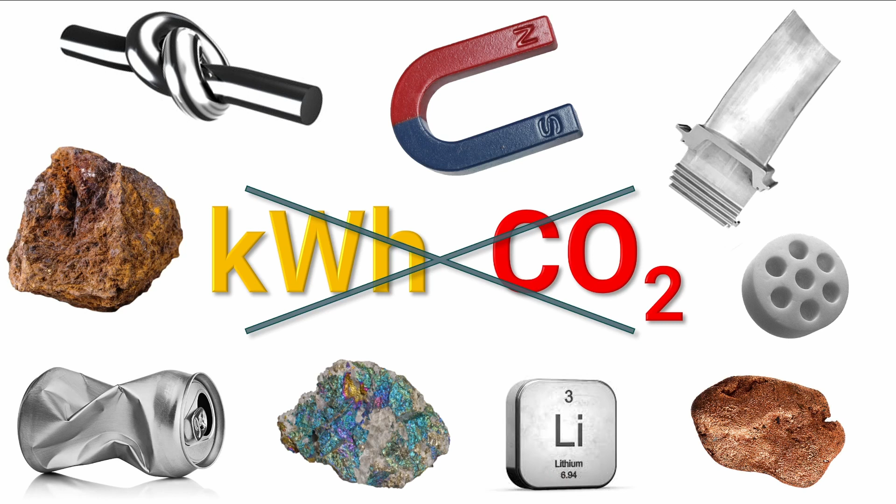But the big contributions, particularly to CO2 emissions, come from primary synthesis, characterized here by the ore or the scrap recycling. But we also have scarcity, such as rare earths, lithium, or copper—elements that are not only energy consuming to mine and produce, but also very scarce. So metals have in the past been part of the environmental problem, and in the future we hope to become part of the solution.

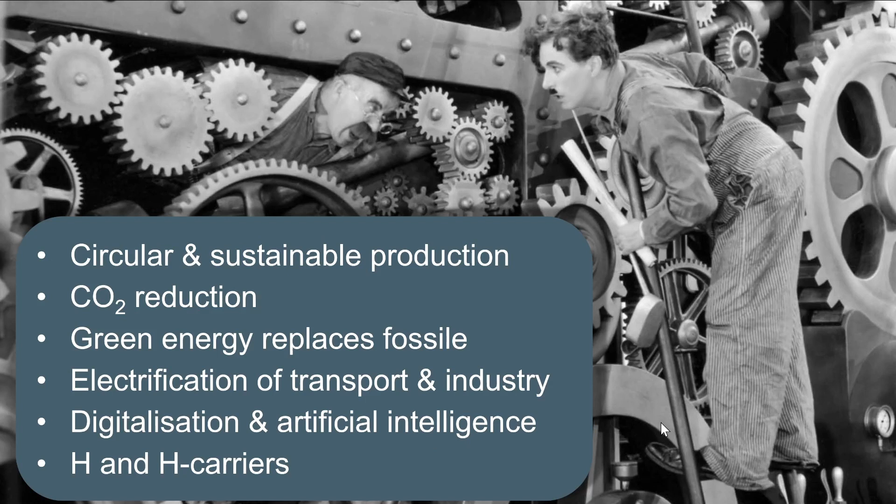Now, these problems do not stand alone, but are entangled together with a couple of related topics. The circular and sustainable production has to do with reducing CO2 emissions and replacing fossil fuel by green energy. Also, the entire transport and industry drives towards electrification, and we render processes and workflows digital to make them more efficient.

And we envision that hydrogen and hydrogen carriers will become very important ingredients of our future sustainable economy. This entanglement shows that sustainability is indeed a system science. Let me put this here on the slide a little bit more in context.

Here you see, first of all, artificial intelligence and digital material flows that enable higher efficiency of materials, processes, and workflows. Then we have materials for electrification that enable current technology trends, such as electrical vehicles. The same applies for sustainable energy sources, like windmill turbines or solar cell absorbers, or materials for electric conduction. And all these materials must be studied.

A very big fraction of sustainable material science is to make materials long-lived. That means the enhancement of corrosion resistance or resistance against hydrogen embrittlement produces materials with higher longevity, and that is one of the very important cornerstones of this field.

A somewhat new idea is maybe to design materials that carry the gene of infinite recycling already in them. That means we must design alloys that are more robust against recycling and the accumulation of tramp elements.

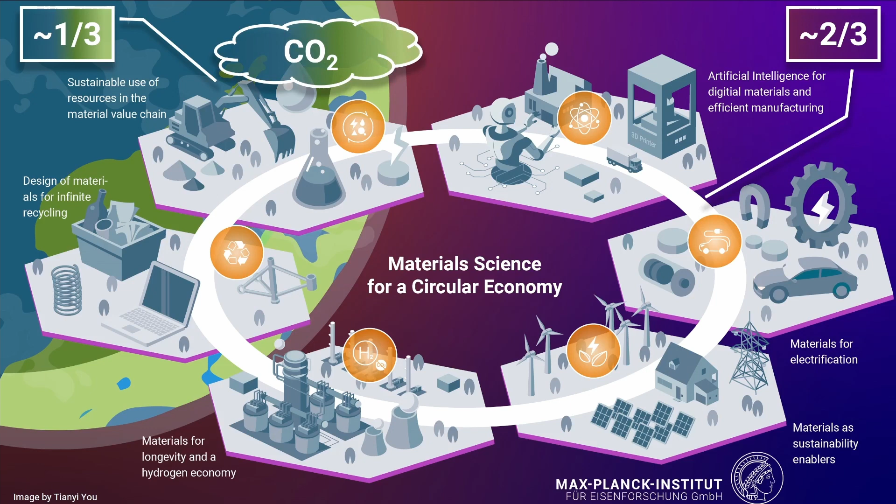And the one-third coming from primary sources, from primary synthesis, is indeed the fraction that causes the highest emissions of carbon dioxide. Now, in terms of efficiency, industry and transport cycles have already become quite good, as you can see from this diagram. So the carbon intensity and energy intensity have actually become better.

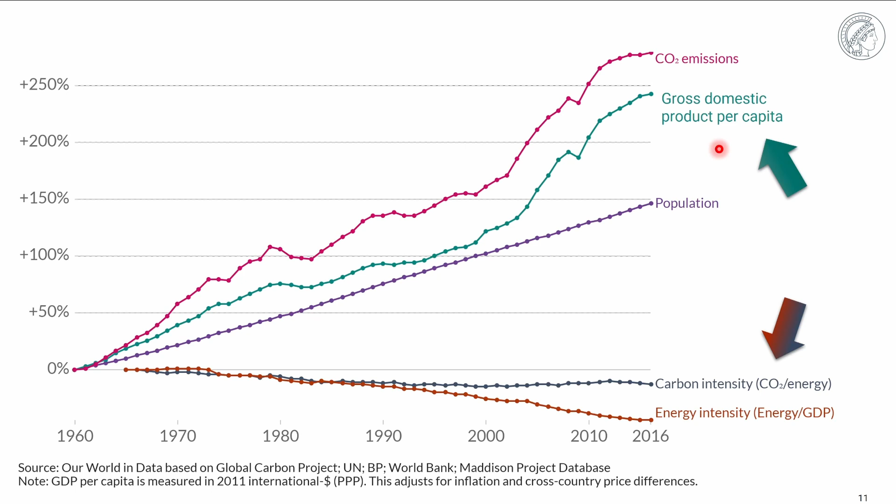But the huge growth in population, here calibrated as a linear function, plus particularly the gross domestic product increase per capita, are the real drivers behind this market growth. Another growth factor of these markets for materials are, of course, the green technologies themselves.

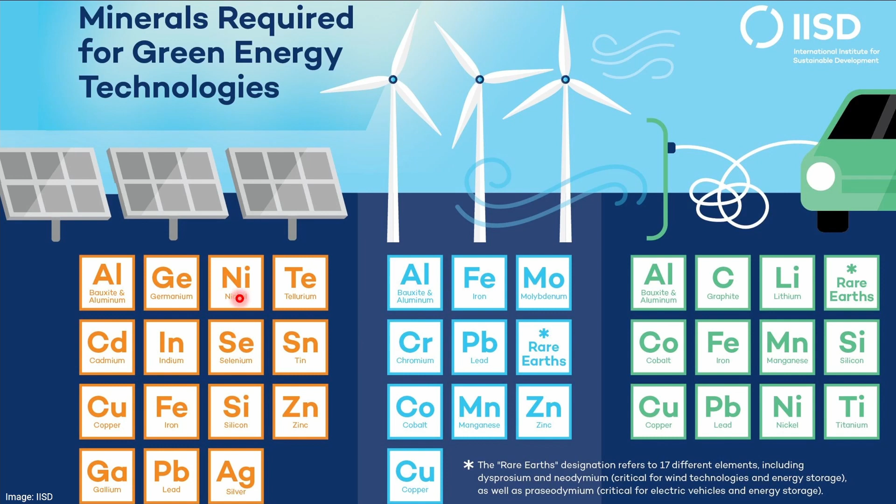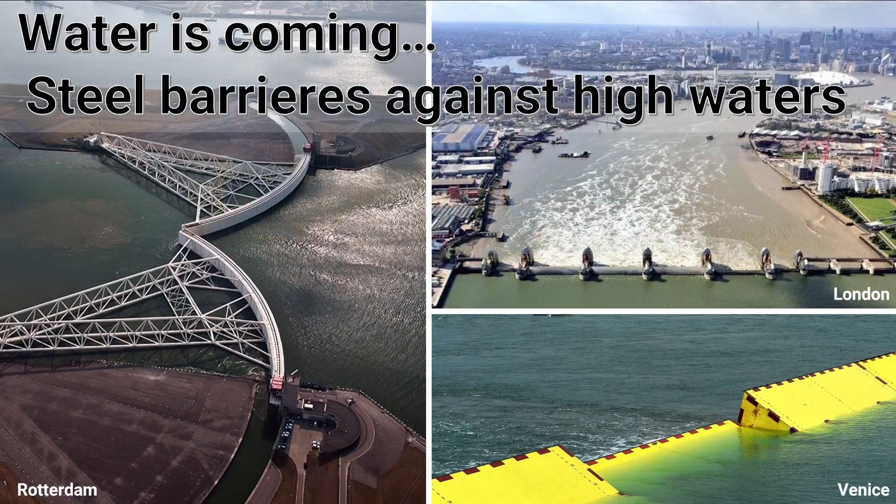Another important driving force of the international markets is that 50%, actually more, of all the world's steel production goes into construction. Due to the growth of GDP, construction goes on and will go on in the next 20 or 30 years. In a worst case scenario, when global warming goes on, we will also encounter increasing tides, and that means we will have to protect our coasts and cities against rising waters.

That means we have a 5-fold acceleration in material consumption due to population, GDP, green energy infrastructures, general infrastructures, and maybe even coastal protection. The good message, however, is that most of these factors can indeed be influenced by materials.

This projection is quite realistic, as you see here from an OECD calculation, which shows that the consumption of raw materials will actually double by the year 2060. This applies, for instance, particularly to materials like iron, copper, or other metals.

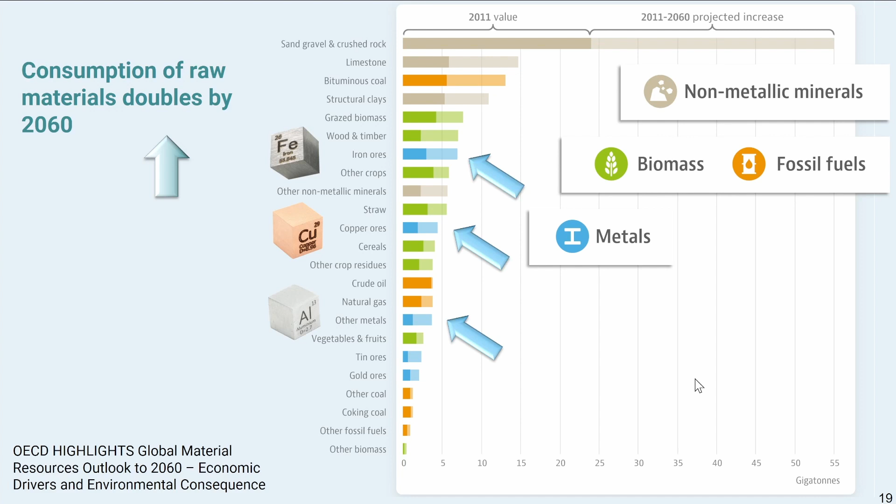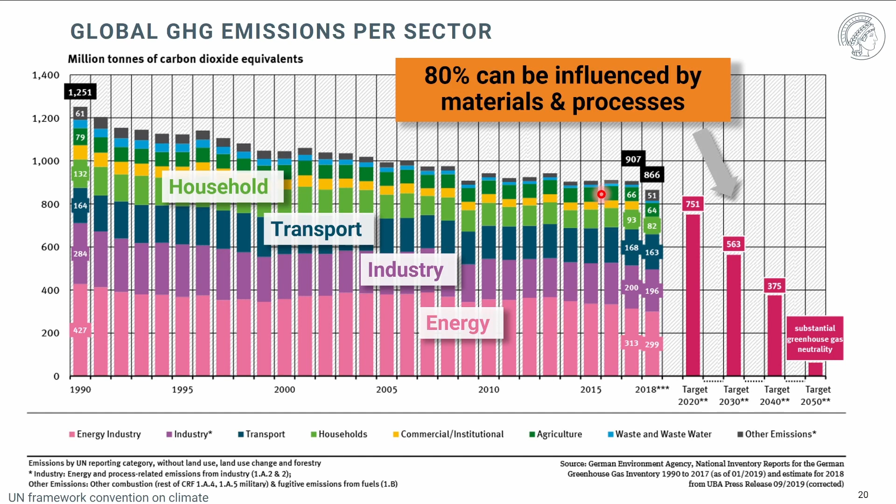Again, a good message is shown here on this diagram, where you see that across all these different sectors like energy, industry, transport, and so on, about 80% can be influenced by materials and processes. That means our field has a very high leverage on improving sustainability.

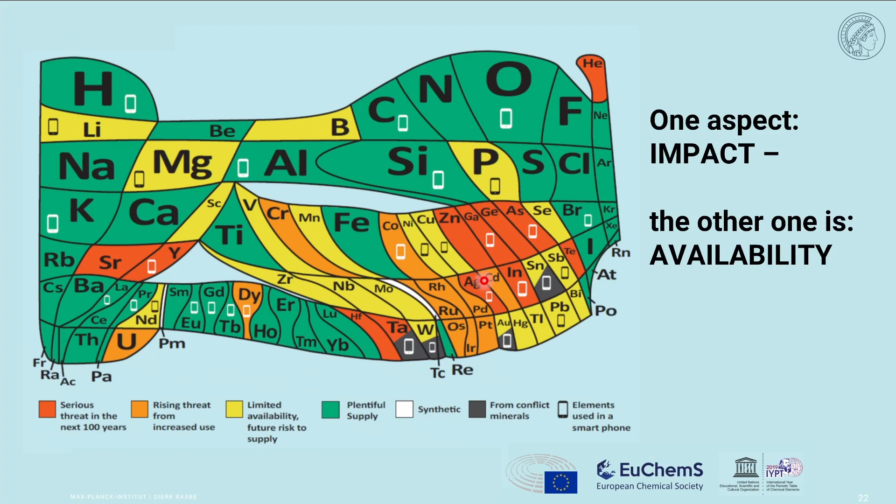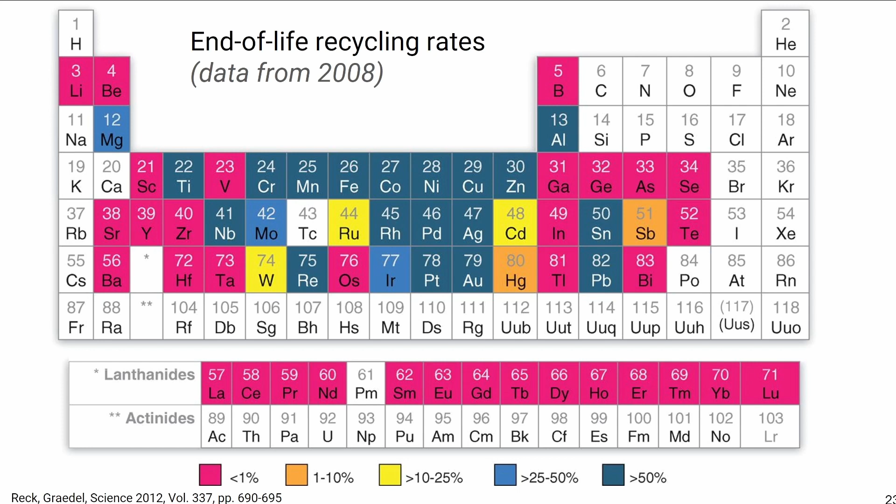What is really interesting is that some of these really important and strategic materials, shown here particularly in red color, have actually, as we can see from this paper, a very low end-of-life recycling rate. That means some of the elements that we need urgently for new technologies and sustainable technologies are practically not recycled. So again, a lot of headroom for improving.

So the punchline is, how do we tame 2 billion tons of metals per year? This number sounds gigantic, but it's actually the true number of metallic materials produced every year. And that comes with a big environmental burden. Metal production stands for about 8% of global energy consumption.

We use about 2.5 billion tons of ores every year, and these productions stand for about one third of all industrial greenhouse gas emissions. So these are really staggering numbers, but again, the good news is that even tiny scientific steps can have a huge leverage. So it's definitely worth working in these fields.

Sustainability needs quantification. What does that mean? Here's just an example of a simple life cycle assessment framework for the case of one part of iron making.

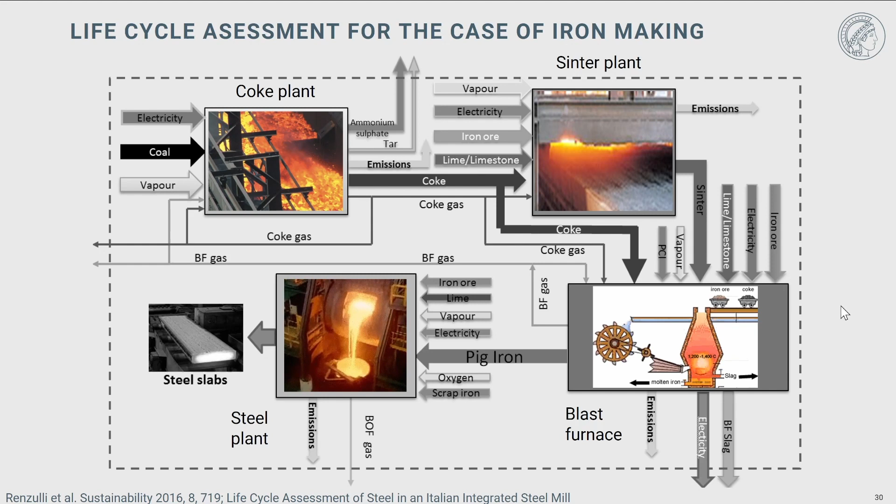This is the first part of iron making, where you see a coke plant, sinter plant, blast furnace, and the oxygen converter. Here you see, marked by these arrows, the different fluxes of feedstock, raw materials, electricity, gases, and so on. You have gates among all these parts of the plant, and you need to really calculate all the inbound and outbound fluxes with respect to quantifying what the real efficiencies and the real sustainability factors of each of these parts of the plant are.

This is very important because otherwise these argumentations and discussions turn out to be sometimes a bit hand-waving. So the quantification must go over the entire product life cycle, and that makes it also hard for industries to arrive at joint quantification measures, because some parts of a production chain have a very high carbon dioxide footprint, while others may look very good when you deliver your material to the customer.

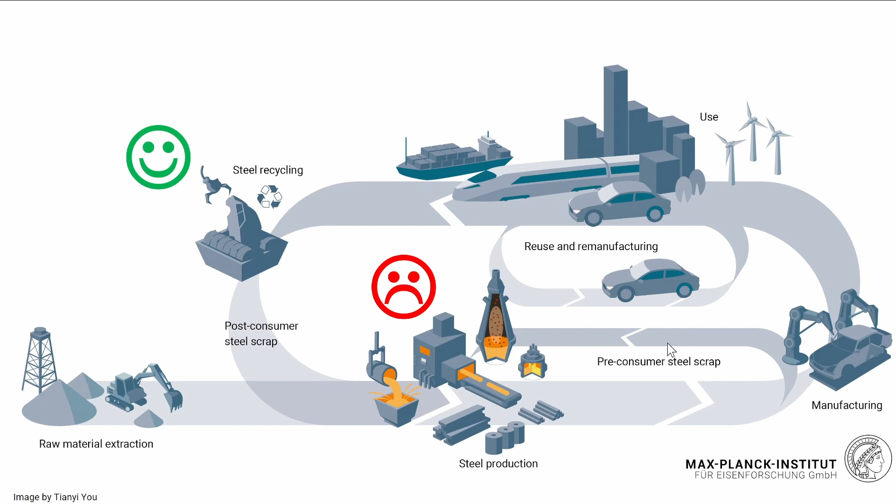And that's why it is hard for companies to agree on joint measures. On the other hand, there's already pressure from the customer industries.

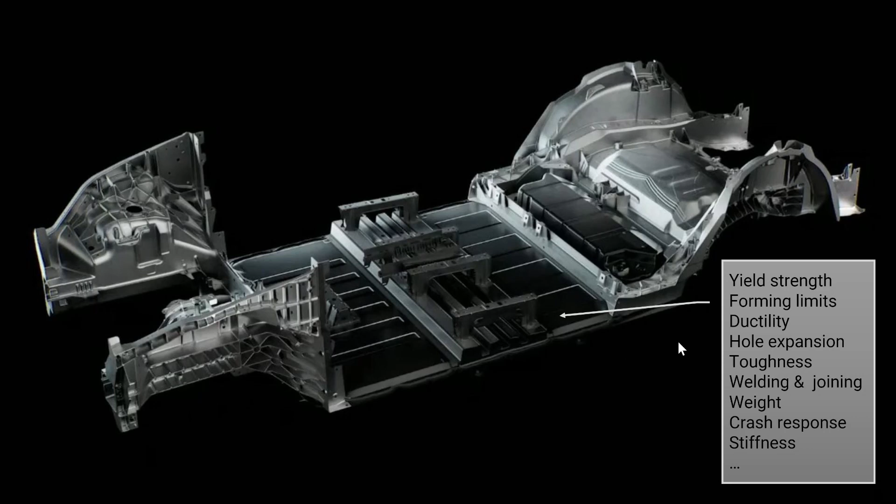Just to give an example for a typical auto part, for an electrical vehicle, we must deliver mechanical information for the manufacturing process, and tell the customer the functional properties like corrosion, longevity, acoustics, and so on. But we currently also encounter a situation where customers want all the information about sustainability: what is the recycling rate, what is the carbon dioxide footprint, and so on. These things are already in the making, and we must find measures to quantify them.

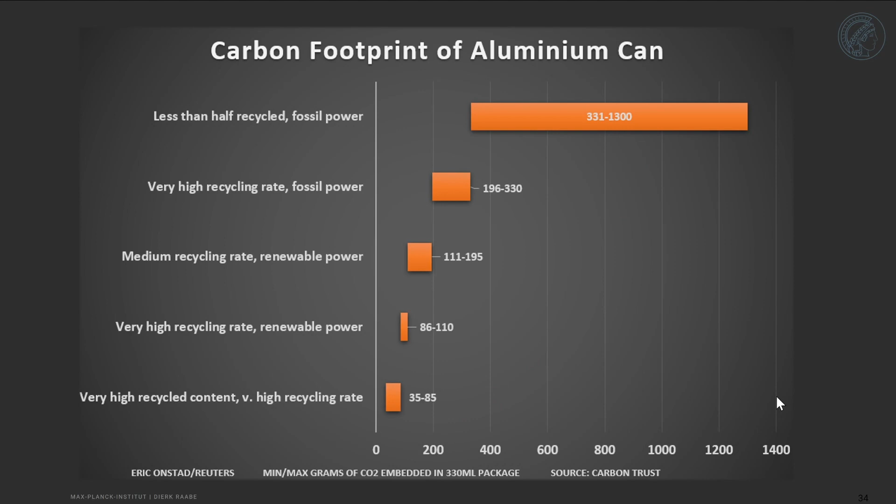This relationship goes down to only about 5% in the best of all worlds, roughly relating to the difference between the embodied energy of aluminum oxide when produced mainly from raw material, versus the relatively low electrical energy needed to remelt material from scraps, because aluminum has a relatively low melting point of only 660 degrees centigrade.

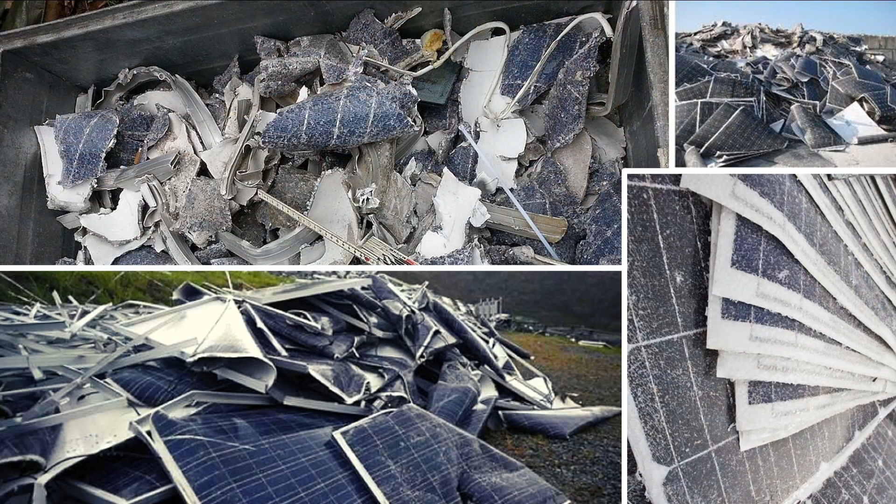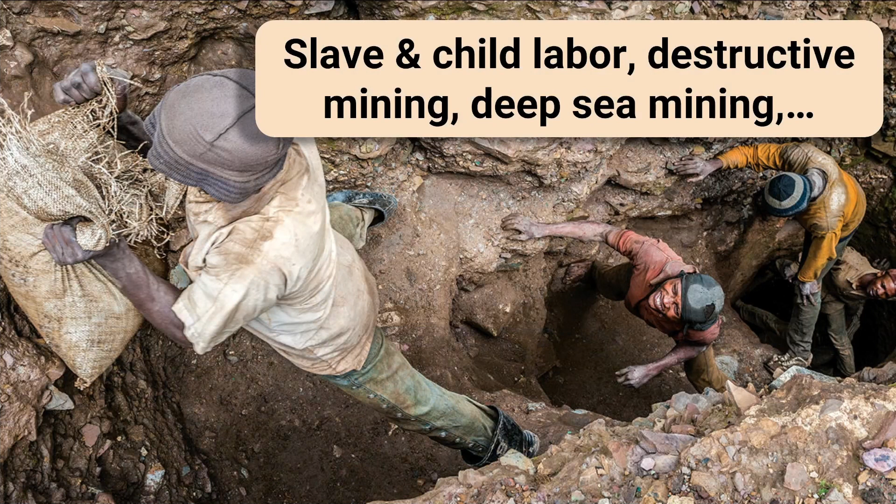Or the question still pending: what to do with scrapped solar cell panels, which contain many precious elements such as silver, copper, and silicon. That means we must in the future take more care of the sustainability and circularity of the green technologies themselves. This includes many other facets and categories, such as avoiding slave or child labor.

Another point is deep sea mining. Due to the scarcity of some elements and growing prices, for instance for copper, cobalt, or nickel, deep sea mining is becoming commercially more viable. But we start doing things at 4 or 5 kilometers depth, of which we do not exactly know the environmental consequences. So driven by the electrification trend, we start doing things that might be harmful for the next generation.

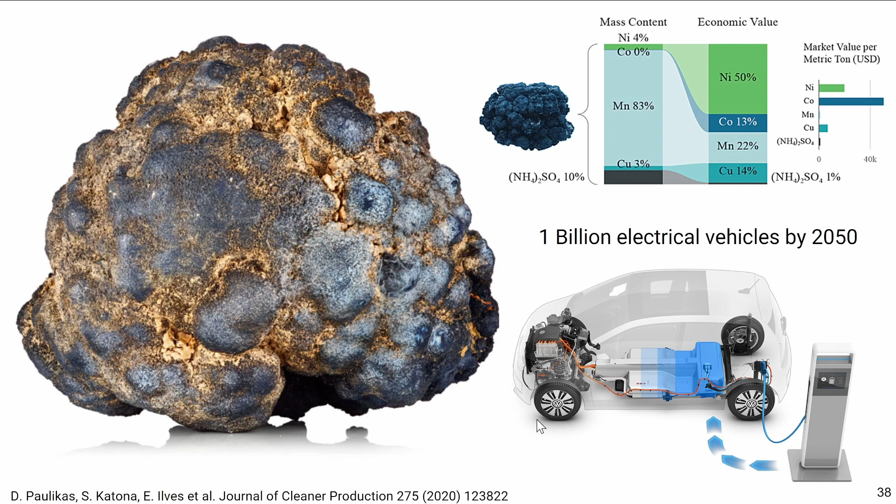Another aspect is the not sufficiently tapped urban mining. You can get 1 kilogram of gold out of about 200 tons of ore from a very good gold mine, for instance in South Africa. You can get the same amount, 1 kilogram of gold, from 3 to 4 tons of mobile phones, particularly from the integrated circuits. Similar arguments apply for platinum group metals.

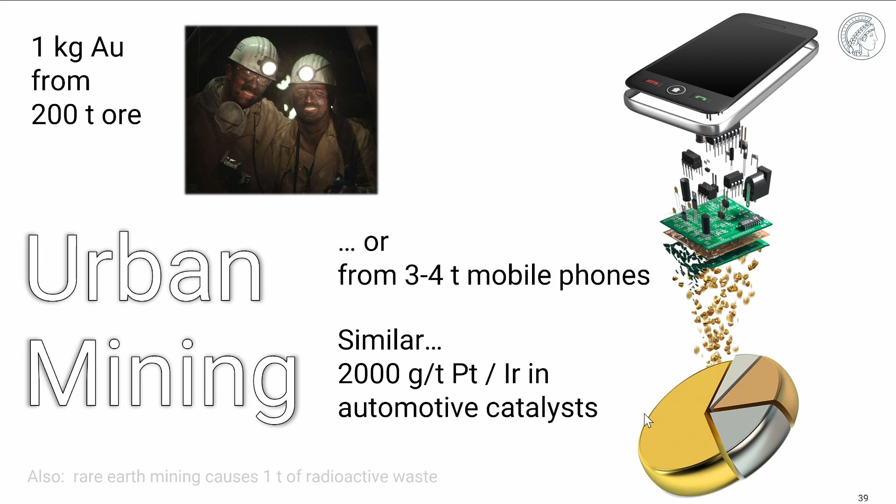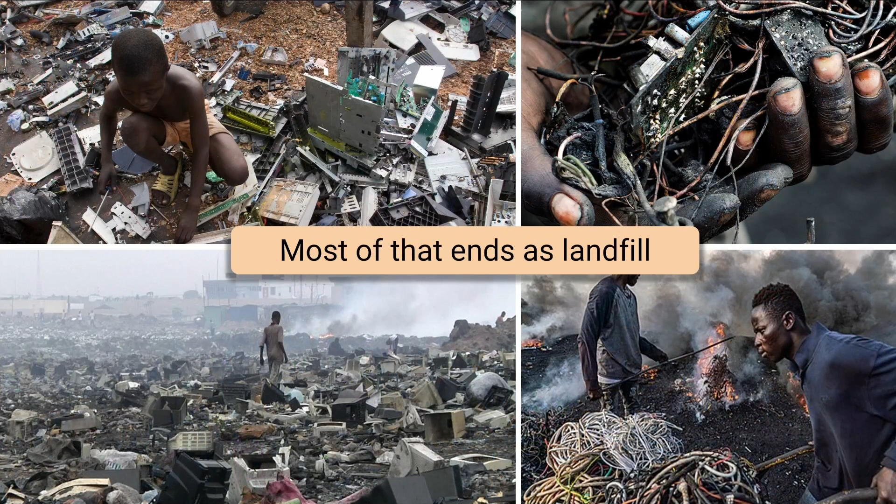That means there's a big opportunity in urban mining. Currently, however, we throw away about 50 billion euros worth of electrical waste every year without using it or recycling it. Most of these materials end up as landfill, for instance in Africa, and often children work to retrieve at least the copper back from these materials.

There will be about 18 billion mobile devices on the market by the year 2024. 75% of those are not collected, and if collected, less than 20% are recycled at all. That means there's again a lot of headroom.

When we look at the recycling of electronic and electrical waste, this is also not yet very mature. What is mainly retrieved is the copper and the gold. Typically you either just crush these scrap parts and melt them to get the copper directly out of a melt shop, or you subject them to a sulfuric acid solution via electrolysis. Then from the cathodic part you get the copper, and the anodic mud contains the gold, which you can subject to a second electrolysis.

But this is not yet all very mature and could be improved to also recycle the many other precious elements that are in these integrated circuits and mobile phones. There are also very interesting alternatives using biomining for getting these precious metals back.

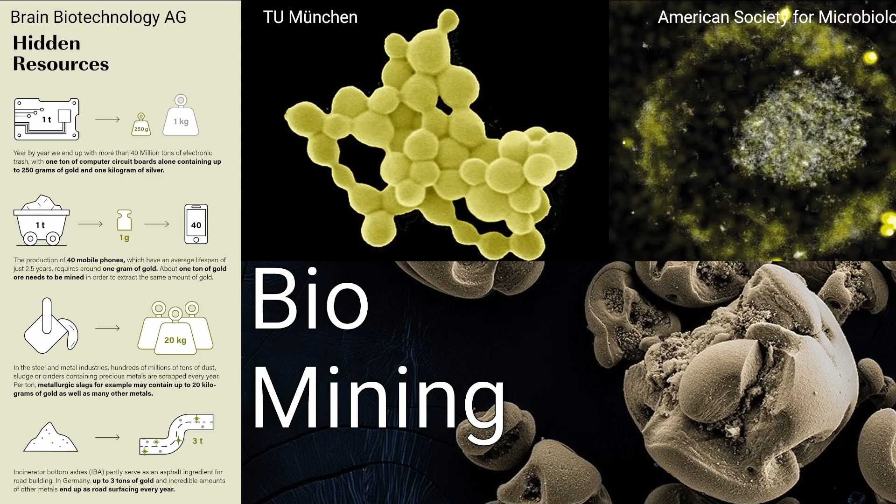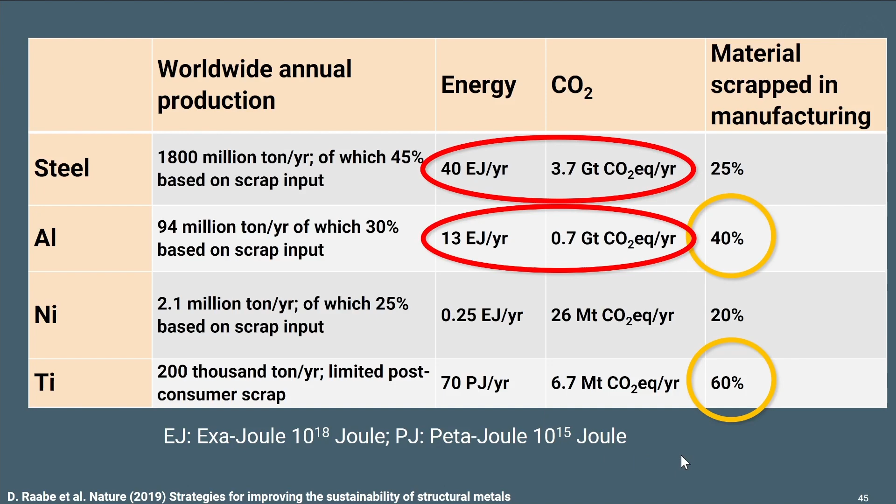Another very important point is not just the energy and CO2 footprint that we already discussed to some extent, but also the enormous quantities that are being scrapped from metal production. That has very often to do, particularly for aluminium and for titanium, with the fact that many parts are chipped out of the full block rather than being made by sheet forming.

Now one could argue from that information that it would be much more viable and sustainable to make parts by additive manufacturing, but also additive manufacturing has drawbacks, as it is a relatively expensive production method, particularly when you go for mass-produced parts. And also the powders cannot be used endlessly, but after a couple of runs you have to rejuvenate them also, and otherwise the parts might become oxidized and brittle.

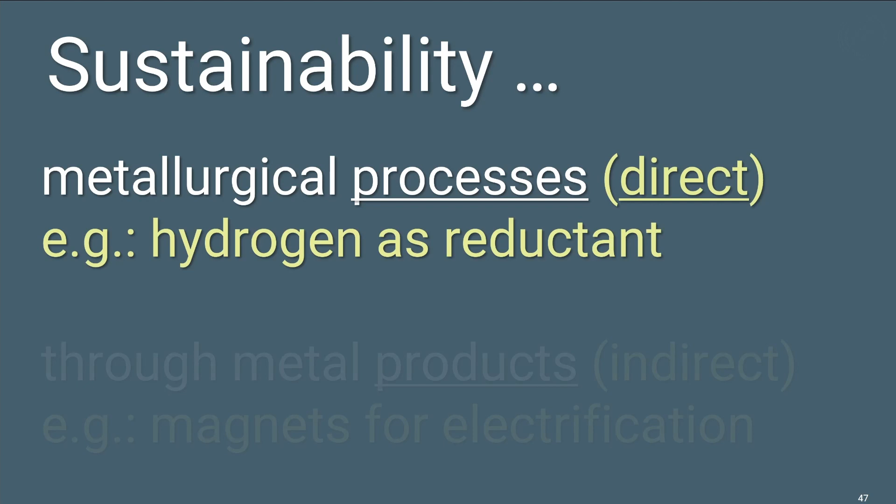As I've already said, we discuss sustainability of metals along two strands, namely metallurgical processes, which we call direct sustainability, such as the use of hydrogen as a reductant in the steel industry, or through metal products, that is indirect sustainability, such as, for instance, magnetic materials for electrification or high-strength materials for lightweight design.

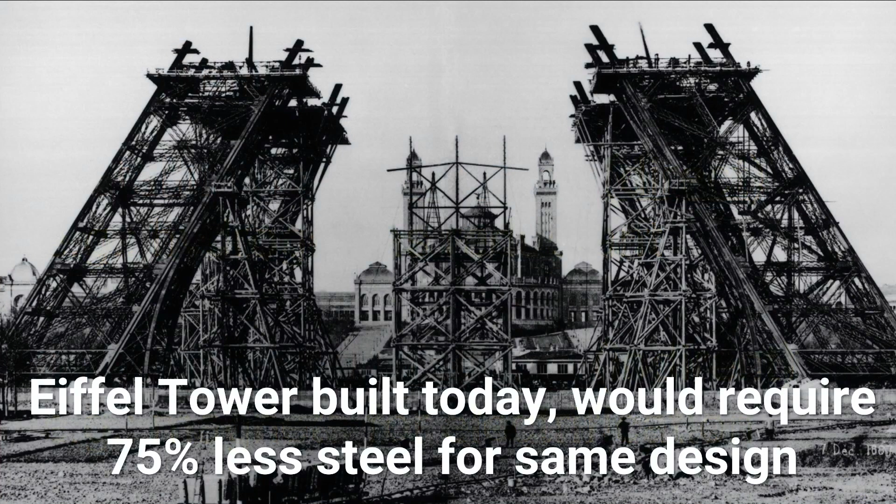Just as an example, if the Eiffel Tower was built today, it would require 75% less steel for exactly the same design. That shows you how impressive the progress in high-strength materials has been since then.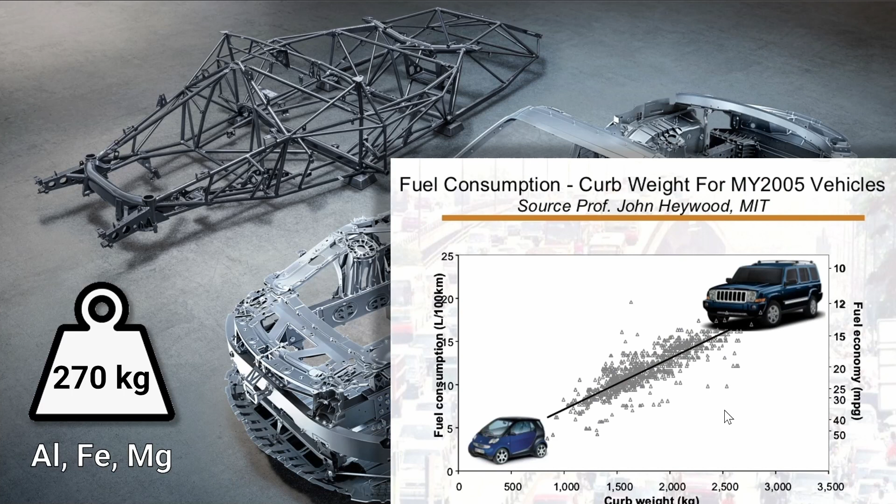This is a quite impressive example of a chassis without the hang-on parts, which consist of high-strength aluminum, iron and magnesium, and has a weight of only 270 kilograms. And that, of course, scales directly with the fuel consumption, whether it's electrical or gasoline. That means weight reduction in the transportation sector is very important.

However, we must take the next step. Look at this example. Here you have a typical mass of a mid-size SUV, 1.7 tons. And the first step, the first assignment was to massively reduce its weight, as you see here, by using higher strength materials. These can be high-strength steels or high-strength aluminum alloys.

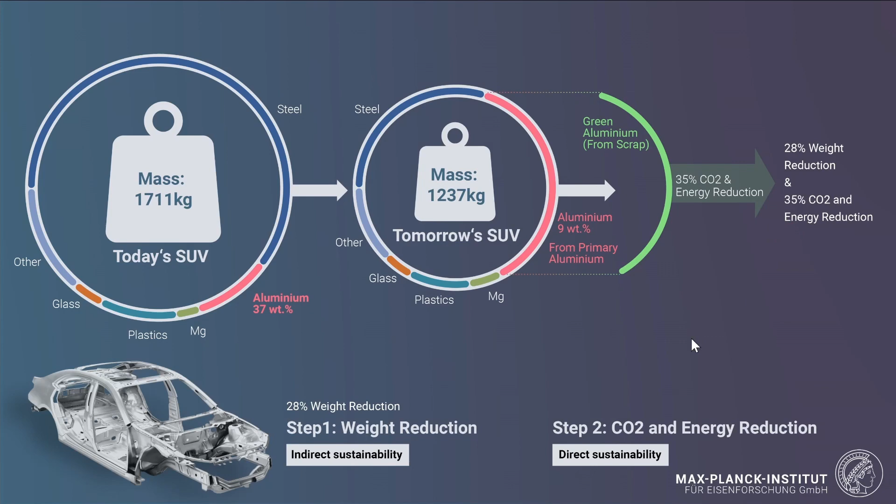But the main point of this slide is that you also now in the next step have to take care to make these high-strength materials by sustainable production methods, for instance from scraps or from hydrogen-based iron ore reduction. And then you can calculate how much reduction you have, not only in weight, but also in the CO2 and energy footprint when you make these materials. This opens up new categories for quantifying high-strength materials for the market.

One of the biggest factors is, of course, the loss of material due to corrosion. That means when you want to do something good for sustainability, you should work on corrosion or hydrogen embrittlement.

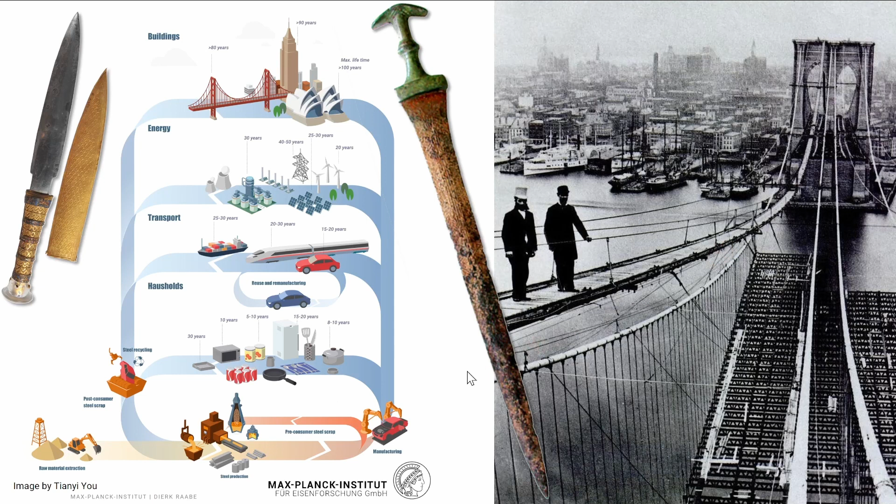This is shown nicely in this diagram, where you have the production cycle that we discussed before, here for the example of steel, but you have a wide distribution of lifetimes for the different products. When you think, for instance, of the Brooklyn Bridge, that building is 150 years old. That is very good from the longevity perspective, but before you get it back, you also have to wait 150 or more years before such materials would enter the scrap market again. So this must be built into consideration regarding scrap markets.

Here are some other nice examples like the dagger of Tutankhamun from meteoritic iron, or a Hittite sword which is 3000 years old from the beginning of the Iron Age.

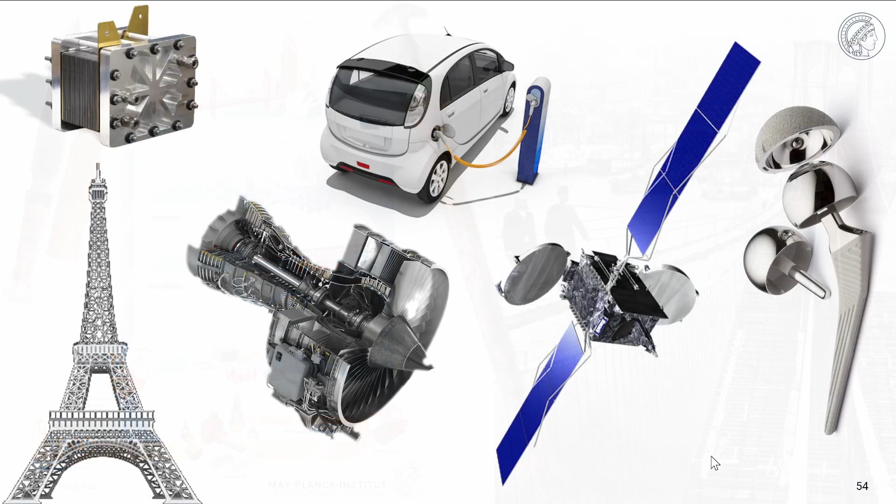So the good thing is, of course, that in our field we have a gigantic global market for materials, namely more than 3,000 billion euros per year. That is very good, but our assignment is the question of how these markets can be turned into circular ones and how they can be rendered more sustainable.

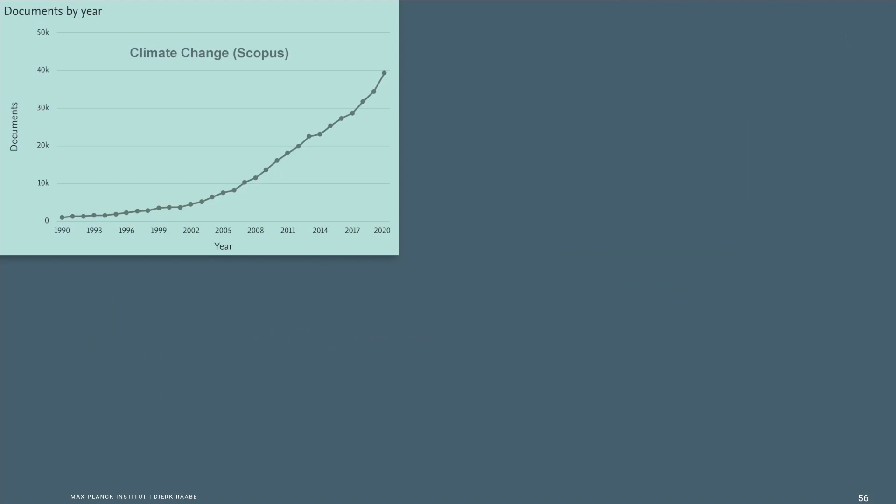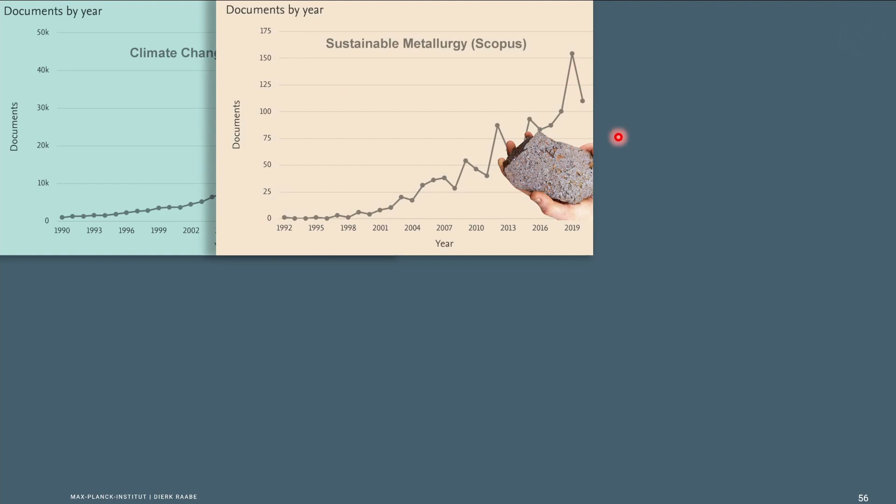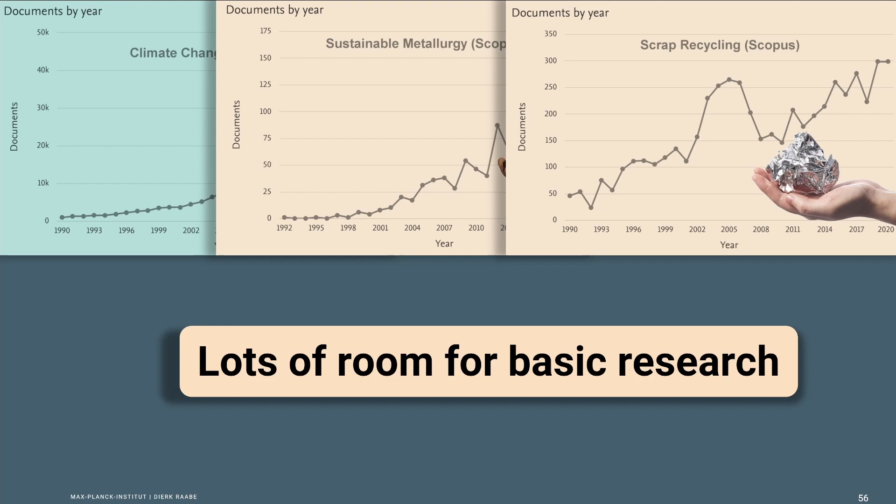And we, of course, as researchers want to know what are the basic research questions. When we look into Scopus, we see that there are more than 40,000 papers every year on climate change, on the science of climate change. But when you look at how many papers are written on sustainable metallurgy, you have maybe between 100 and 150. And similar numbers apply for scrap recycling. When you look for papers that deal with the science of scrap recycling, you maybe find about 300 papers. So that means there's lots of headroom for basic research, not only to study the effects of CO2 emissions and energy consumption on climate change, but also to find solutions for solving these problems.

In the Gates Notes blog of Bill Gates, you find the comment: whenever I hear an idea for what we can do to keep global warming in check, I always ask, what's your plan for steel? So let's go a little deeper here and give the man an answer.

We already saw that the market for steel is growing enormously. Towards 2050, we envisage consumption of about 2.8 billion tons of steel per year.

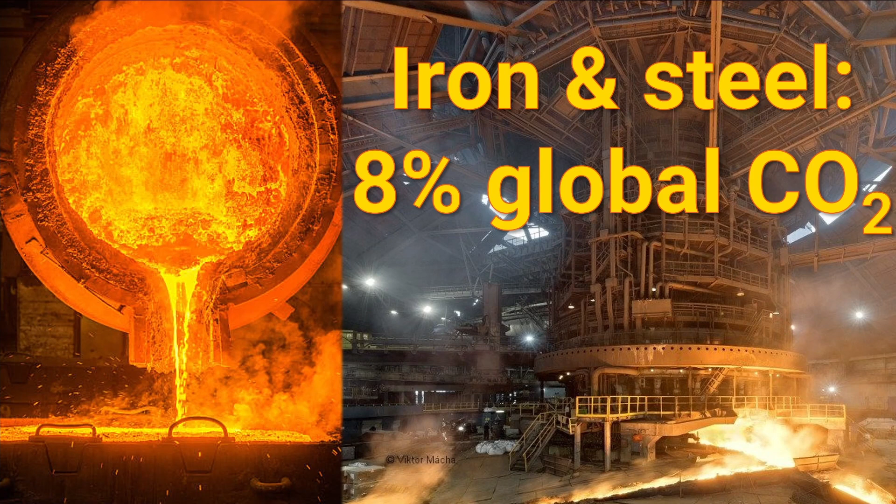This incredibly large amount of material is a big environmental burden because the primary synthesis of iron from its ores, like hematite, is made using carbon carriers as reductants to produce iron, and that gives in the mass balance very high CO2 emissions. That is the reason why iron and steel making stand for about 8% of global CO2 emissions.

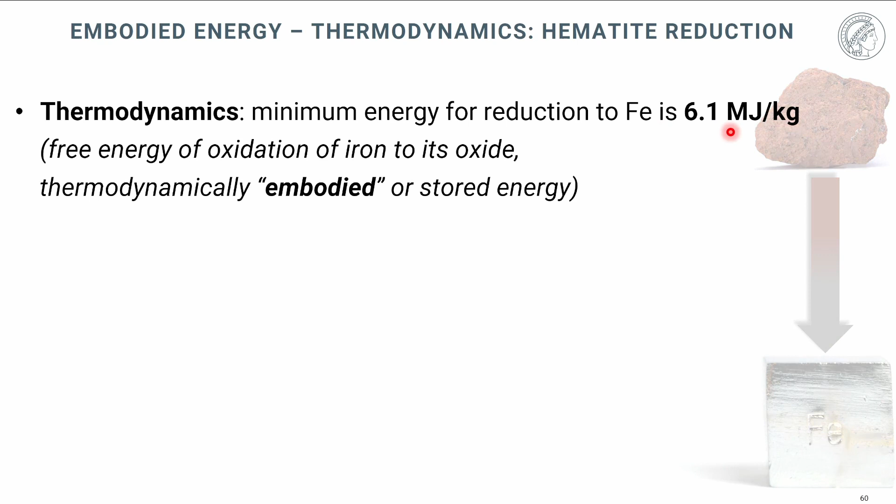When we look just at the thermodynamic limits, we see that we have about 6 megajoules per kilogram embodied in the iron oxide—that is the thermodynamically stored energy of the iron oxide. When we measure from cradle to grave the total energy required to make iron, we talk about 20 to 35 megajoules per kilogram, which is actually quite good compared to most other metals, but much more compared to the embodied energy. That means most of the energy is lost as waste heat, and that applies to many metals.

So one solution is reducing the iron ores with hydrogen instead of carbon carriers. This overview compiles a couple of options that we have.

In the center you find the raw materials—scraps, fines, and lump ores—and you can subject them to reduction cycles with a couple of reduction means, like different types of molecules, such as hydrogen or ammonia. You can use electrons directly, you can even use protons or ions, and they can have different aggregate states like gas, solid, liquid, or plasma.

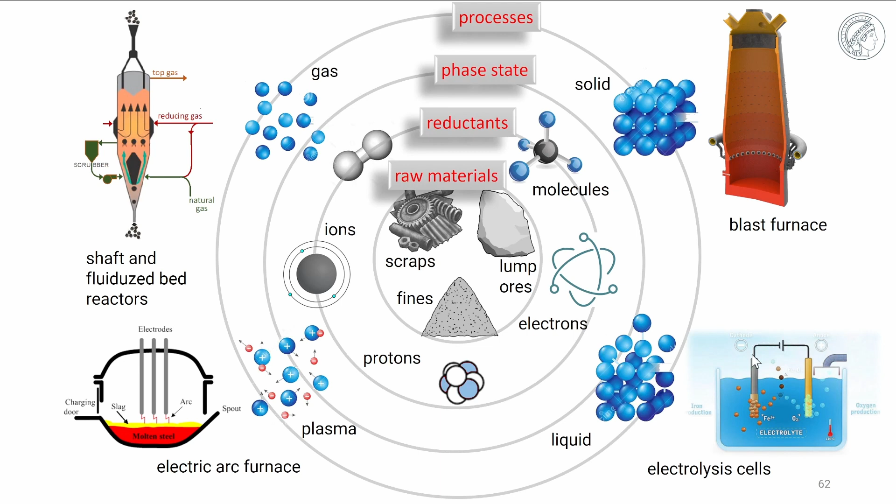From these considerations you arrive at a number of different possible processing pathways for how you can reduce iron. Each of these pathways has an individual energy, CO2, and hydrogen footprint that must be considered. Let me show you a few examples about hydrogen-based direct reduction of solid oxides that are exposed directly to hydrogen.

Here we have the kinetics at 700 degrees centigrade under hydrogen atmosphere. First you see the very fast reaction rate from hematite to magnetite and from magnetite further to wüstite. But as soon as you get into the wüstite reduction state, which is further reduced towards iron, the reaction becomes very sluggish and slower and slower as you go along.

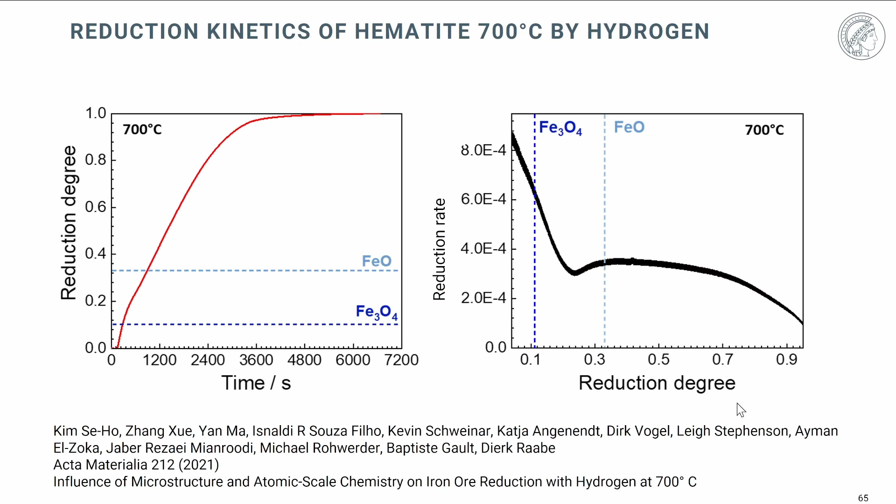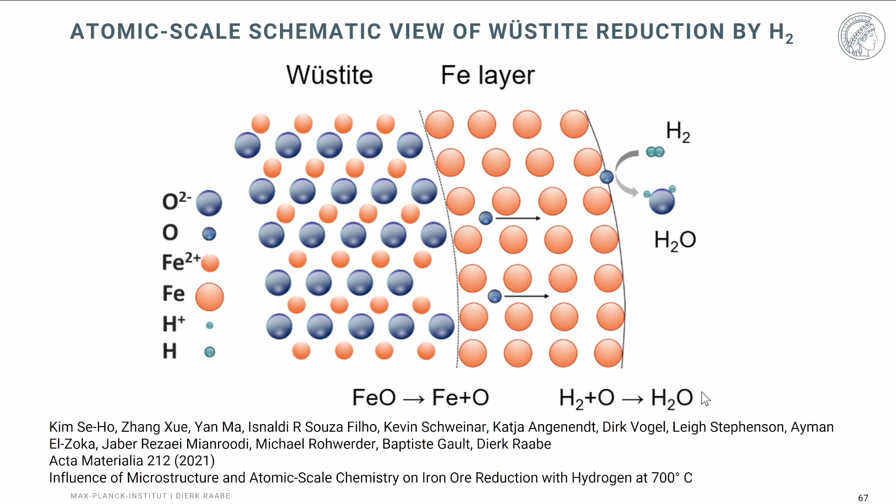This is shown schematically here. That means the oxygen from the wüstite must escape through that iron layer towards the surface, where it can recombine with hydrogen to form water. This is the current picture that we have about this process.

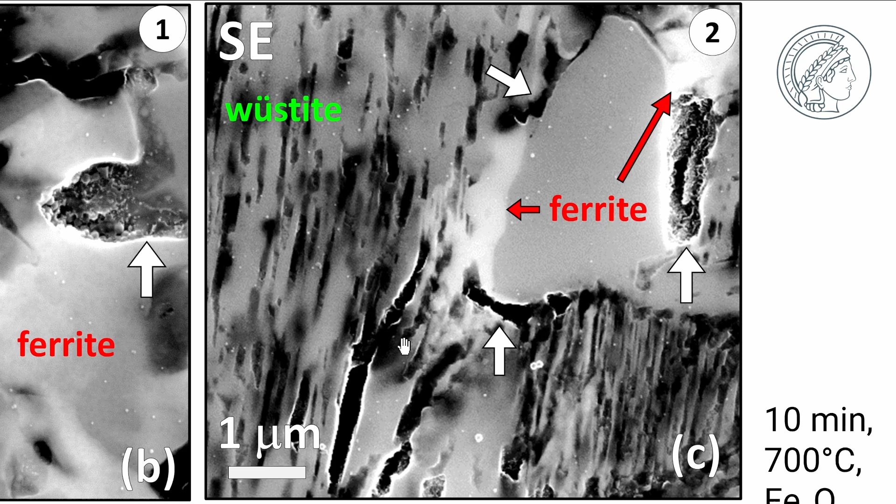However, when we really look into the microstructure, you see that things are much more complicated. There are very different microstructure features that form—for instance, the ferrite with delamination that you see here, formed on the core region of wüstite. You also see cracks, delamination, and very complicated substructure features. These microstructures were taken after 10 minutes at 700 degrees centigrade under hydrogen atmosphere.

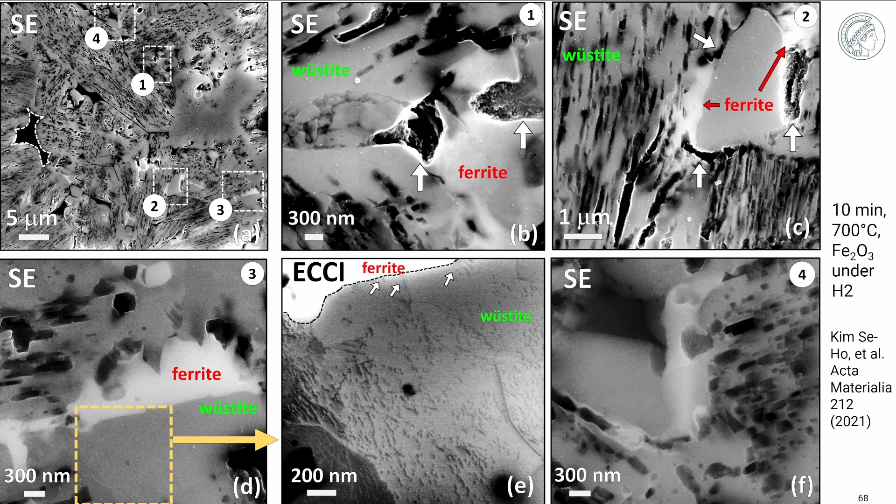Here you see, in the electron channeling contrast imaging, very complex dislocation substructures form. This has to do with the fact that the different oxide states and metal states occupy very different volumes, which means you not only form massive pore structures during reduction, but also build up very high stresses.

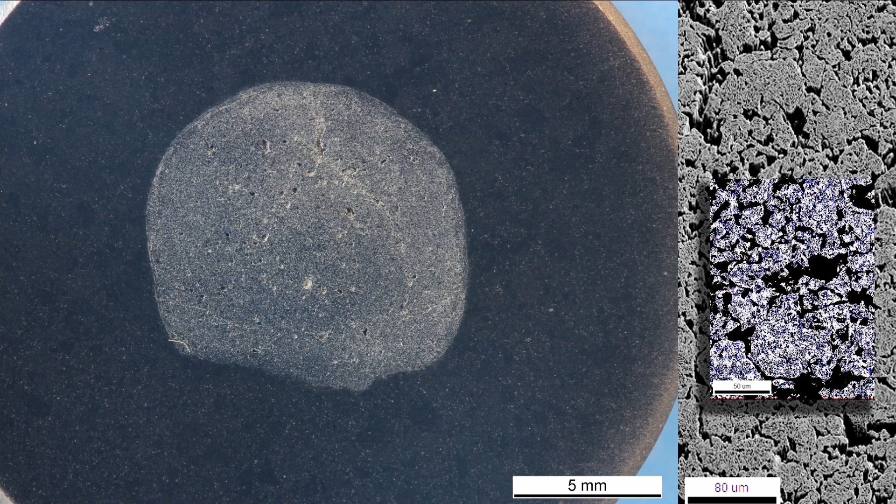Now, if we walk through such a commercial pellet, this little oxide piece that is an agglomerate of fine ores is called a pellet, typically used in direct reduction. When you cut it open, you can subject it to all kinds of microscopy mapping techniques, chemical or structural. You can look at the phase, the distribution of grain boundaries, and so on - the same things you would do in ordinary materials - and you get these very complex microstructures revealed.

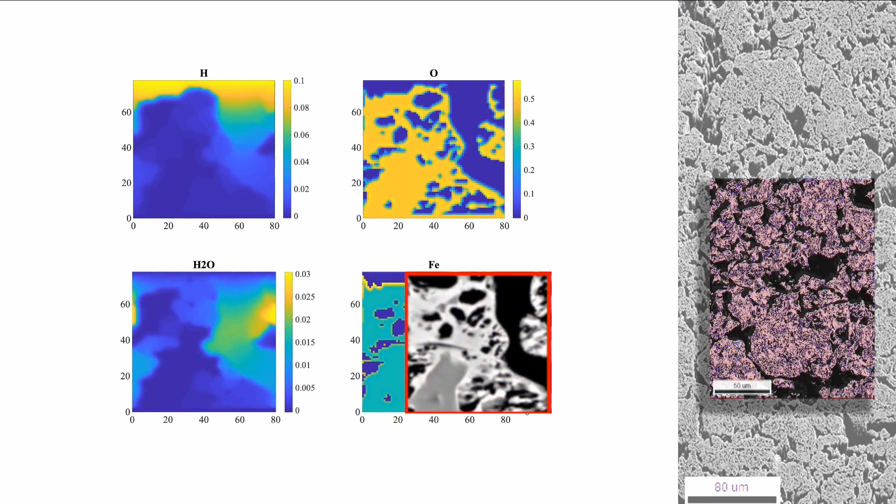Now we are interested in subjecting them to a boundary condition treatment through a corresponding phase field calculation. In this phase field calculation you can see the diffusion of the hydrogen and the oxygen, and the formation of water as a reaction product. In this diagram you see how the iron is starting to penetrate the former oxide.

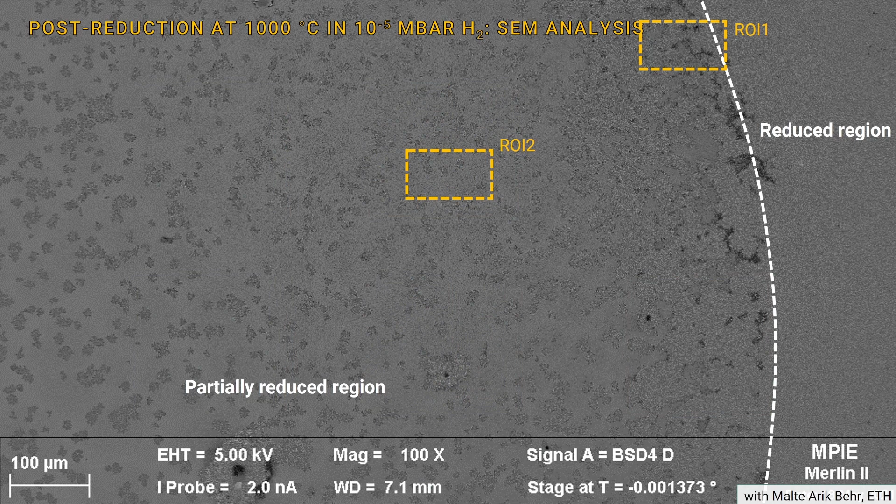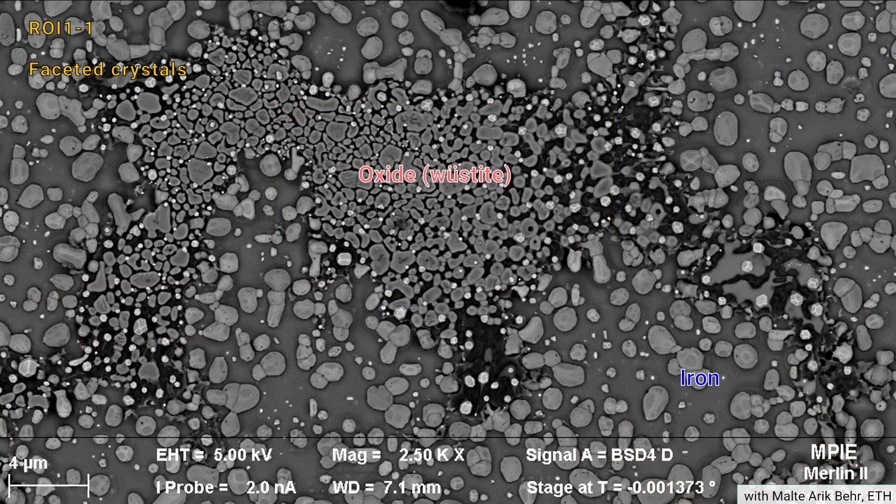Now the next step - this is again a collaboration with colleagues at ETH Zurich, here with Malte Arik Behr - we try to study these things also in quasi two-dimensional wüstite films, which we subject in situ to a hydrogen atmosphere, and then study how the iron is really forming between the different wüstite layers, under reduced dimensions in quasi 2 dimensions. Here you see how these very beautiful shapes of the iron nuclei are forming.

We also look at the characteristics of these pores that form at very high resolution. This is high angle annular dark field imaging. Through electron tomography, we aim to study not just the dispersion and distribution of the pores, but also how they are connected - that means how they percolate. This is very important information we need to better understand how gas transport in the material takes place.

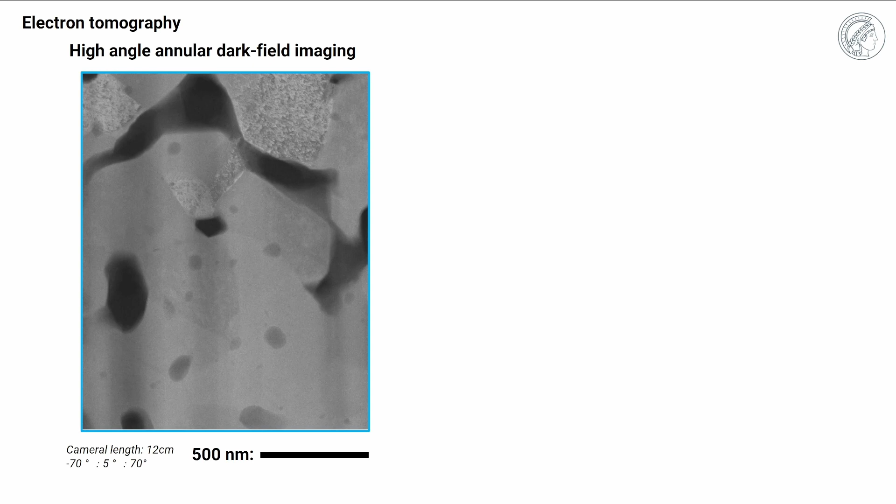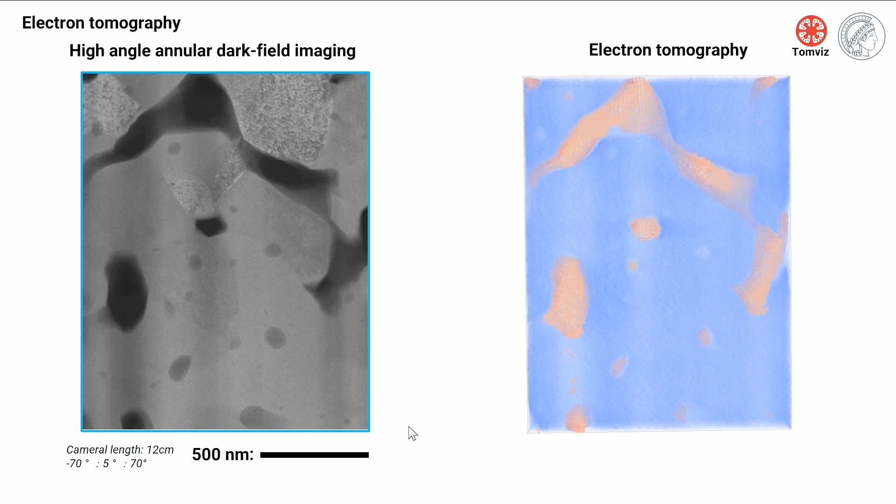Here you see a complex polycrystalline structure around such pores that form, and you can see that many of these pores are actually highly isolated - not connected, so that the water forming inside these pores cannot leave the material but stays inside. And that is quite interesting.

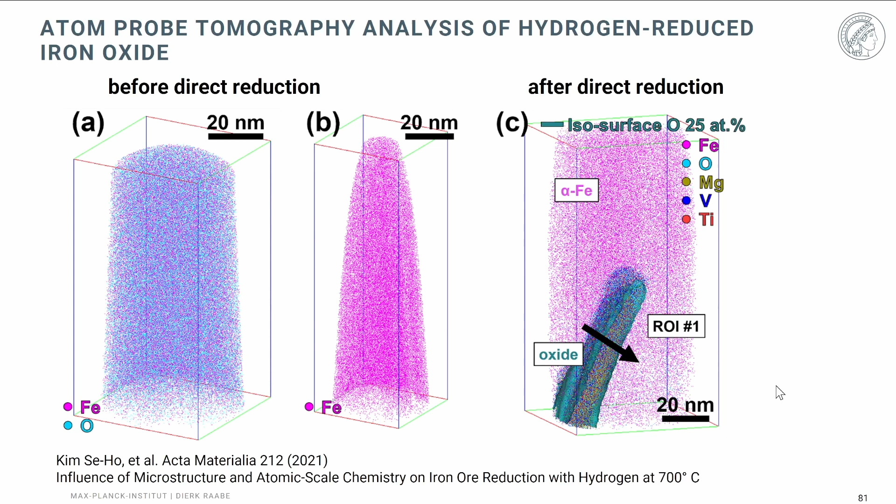We also go to the near atomic scale by using atom probe tomography for these materials. Here you see that before reduction you see just the wüstite material, a wüstite single crystal, and after partial reduction you see the BCC iron that has formed, but also, due to the gangue, the chemical tramp material that was in these ores. You see that some of these oxides have prevailed and remain in the material, and we study their role in the formation of water, for catalysis, but also for delays in the reduction kinetics.

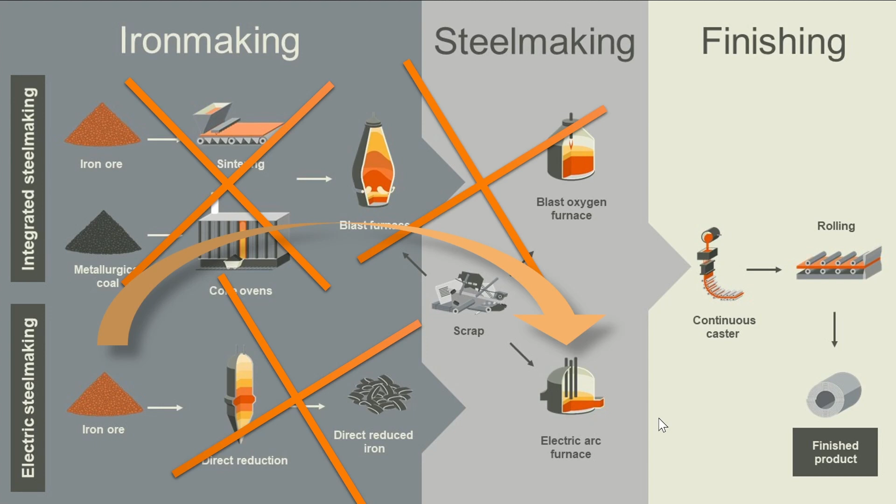We flood the reactor chamber with argon and add about 10% hydrogen gas, then ignite the plasma in the material for durations of 1 minute. Then we stop the process, take the specimens out and test them for the iron content formed, put them back into the oven, flood the chamber with the same gas mixture, and ignite the plasma again. By this we could show that after 15 minutes, and definitely after 20 to 30 minutes, you have under these conditions produced pure iron directly from the ore.

We found this a very interesting and viable alternative to direct reduction using hydrogen, because here the efficiency of hydrogen consumption is very good. Secondly, even if you go through the direct reduction route, at the end of the process you must put your iron sponge from that process into such an electric arc furnace anyway.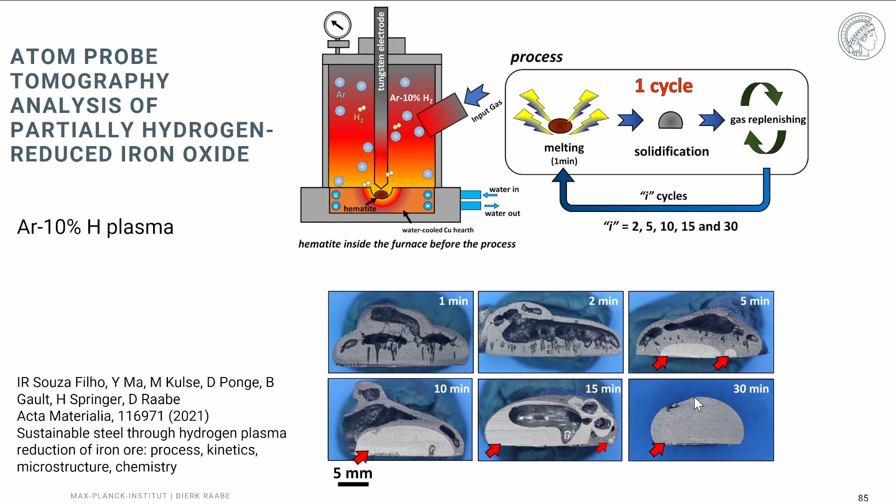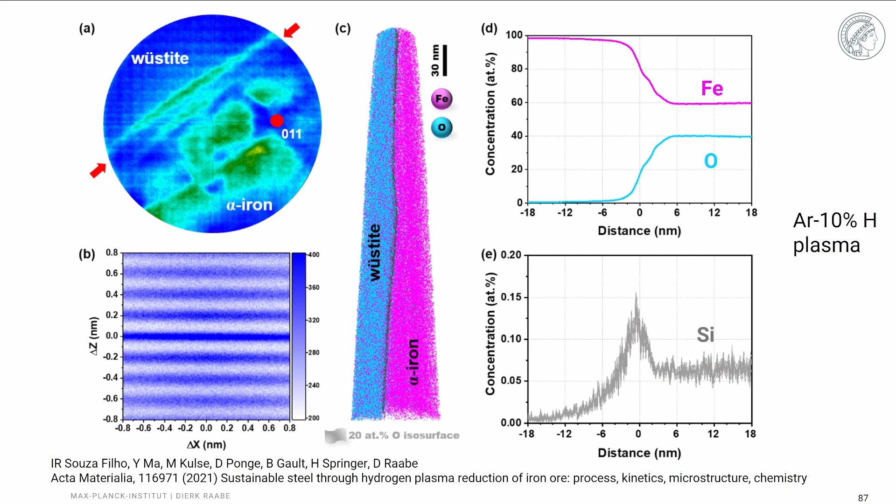Here you see beautiful microstructures that form under these conditions. Again we do atomic scale analysis and see a very interesting interface between the wüstite and the alpha iron. This is a partially reduced material with some remaining wüstite, and you see that the silicon sitting on the interface between these two phases seems to play quite a big role. So in further research we have to take the chemical composition of the oxides into account, along with the slag metallurgy in the secondary or ladle metallurgy.

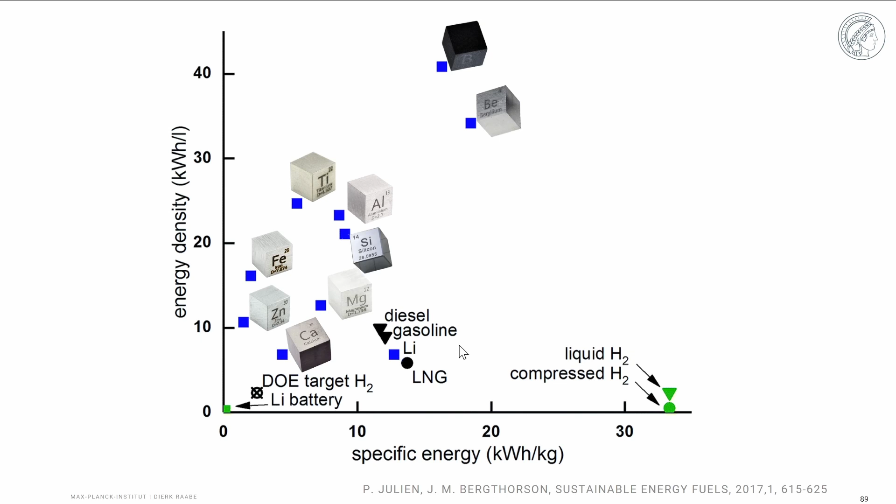I borrowed this picture from a nice paper by Bergthorson from McGill University in Canada. He and colleagues suggest that metals can also be burned and used as fuel, which you can then recycle. That idea is really interesting when you look at this diagram plotting energy density against specific energy. Metals are very viable here, and in part have much better properties than established energy carriers like diesel, gasoline, or hydrogen. The idea is to use metal powders, like iron, combust them in a chamber to get energy out, then subject the powders again to a reduction process and reuse them. The first pilot plants have already been realized, for instance at the university in Eindhoven in the Netherlands. These topics are related, and we've started studying some of these microstructural features too.

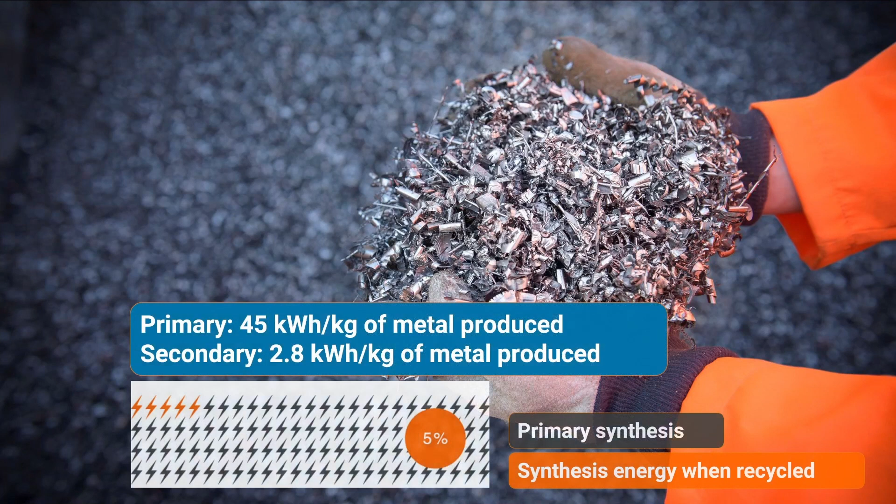Now a few words about aluminum. I mentioned before there's a very high discrepancy between the primary energy needed to make aluminum from ore and the very low energy needed when making it from scrap, due to aluminum's low melting point. This amounts to only 5% of the energy compared to primary synthesis.

However, aluminum alloys cannot be mixed very well. We have a couple of very big aluminum alloy classes, such as the cast blocks with very high silicon content, and the famous aluminum-copper alloys used for high strength plane parts. We also have scraps from mixed components of aluminum and iron, which carry a very high iron content, typically very undesired for aluminum.

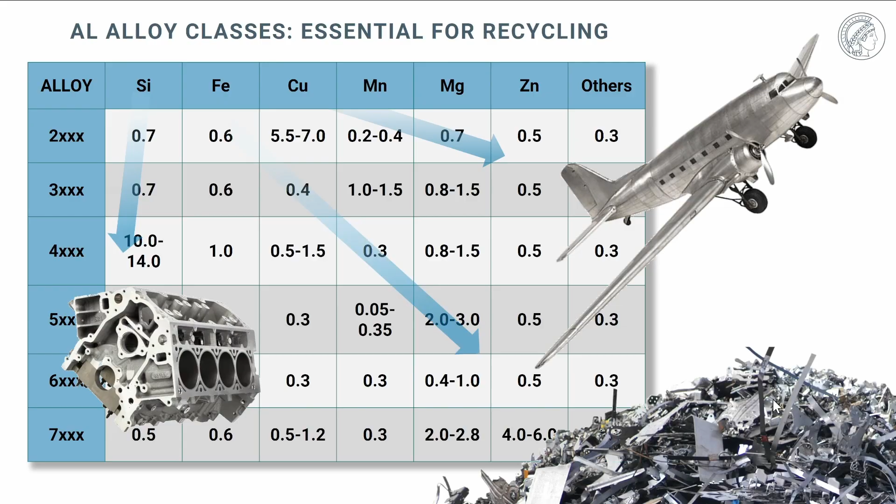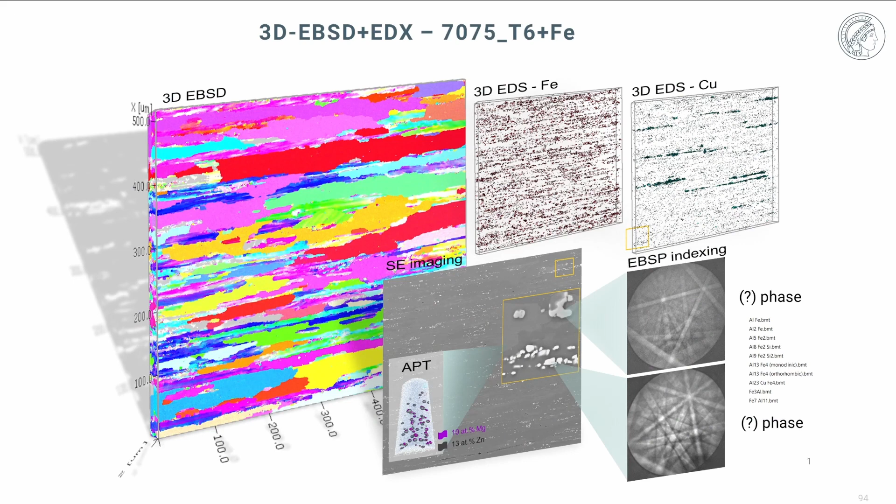That means for some high-end packaging applications, this material can no longer be used. But it also shows that a very interesting option for research in the field of aluminum is identifying alloys which are more robust against tramp elements, as these accumulate over recycling cycles. That is, so to say, the science of less pure materials. In aluminum alloys particularly, iron is a big problem because it forms brittle intermetallic phases. One can, for instance, when tolerating higher iron content, try to change these intermetallics through further alloying to make the overall scrap-containing alloy more robust towards recycling.

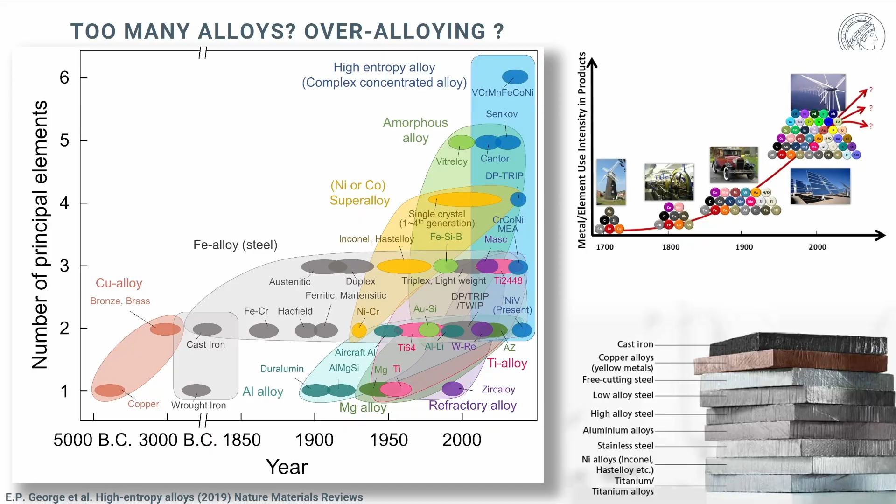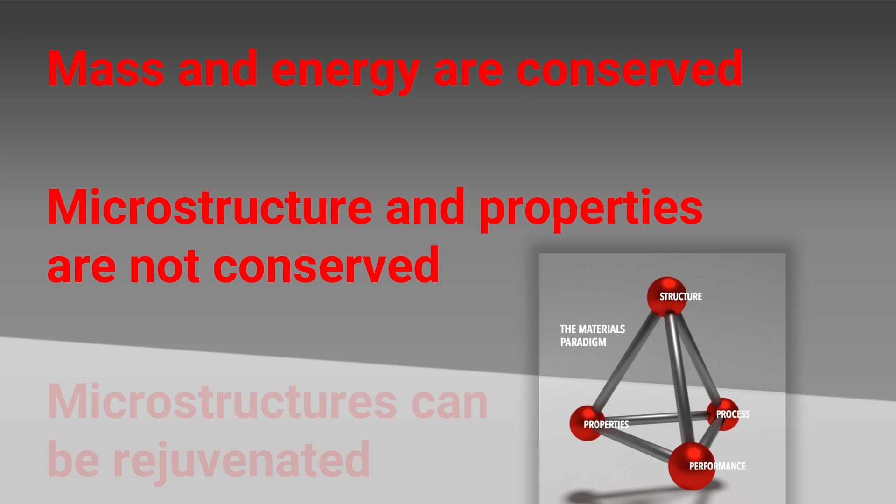So principally, that shows us that mass and energy are conserved quantities, but microstructure and properties, the main cornerstones of our field of materials science, are not conserved. And that is a very good message, because by microstructure design, heat treatment, and forming processes, we can create new microstructures and rejuvenate established ones, as you see in this little movie.

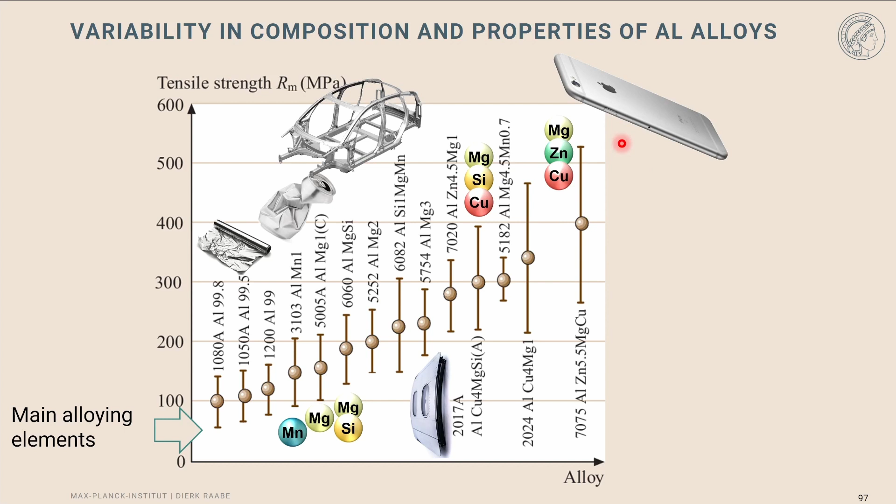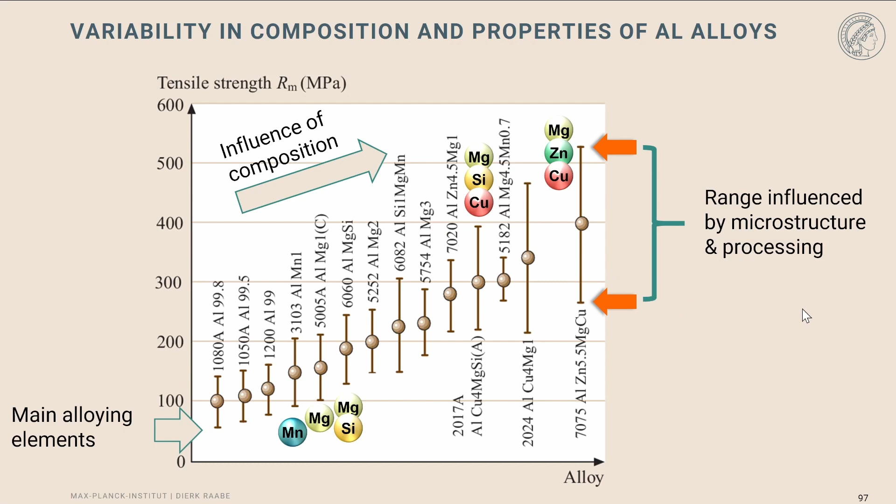On one hand, we see a clear trend that the tensile strength of these alloys increases with the overall alloying content. But on the other hand, you also realize there's a huge scatter for each of these alloy groups—a big range for tensile strength that can obviously be influenced by microstructure and processing. That means in the future we should maybe try to design a higher variety of materials, not through chemical variants, but through microstructure variants.

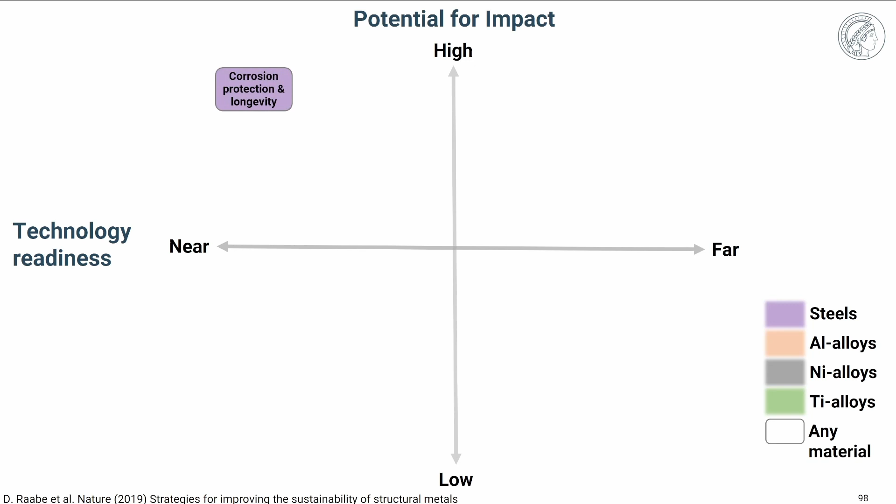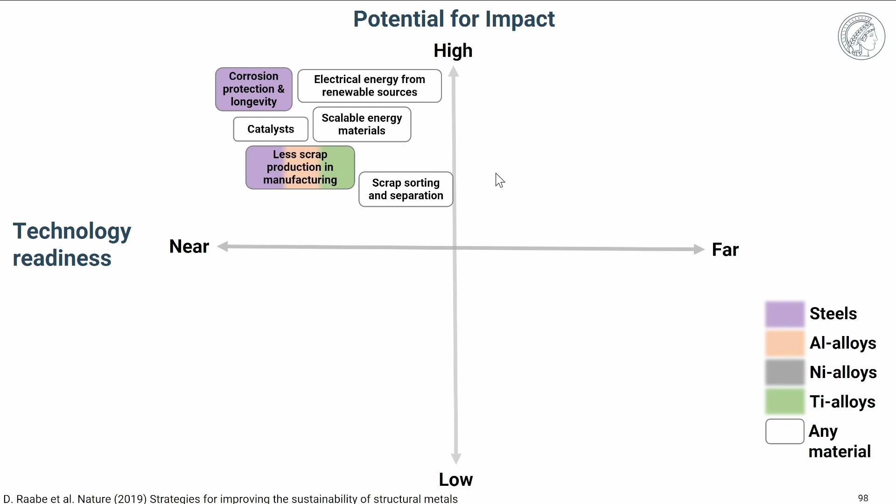When I put that in an overview diagram showing technology readiness of different measures against potential for impact, the highest impact and TRL level comes from longevity measures, but also from using electrical energy from renewable sources, producing less scrap in manufacturing, and indirect effects from catalysts, scalable energy materials, and so on. With less technology readiness but very high potential for impact, we find plasma chemistry that can be used for alloy or ore reduction, or methods that reduce material from primary ores without using carbon carriers.

In that overview diagram, I think one can say that some of these topics have relatively high risk, but also very high gain. And again, as I said in the beginning, there's a lot of headroom for basic research in all of these fields.

With that, I think I conclude here, and thank you again very, very much that I could deliver the Kelly lecture today and summarize that there are really, really big effects which deserve a lot of basic research from the materials science community.

When we talk about greenhouse gas emissions, energy consumption, and effects coming from mining, then definitely we want to look at iron, aluminum, and other materials. When it comes to scarcity or even toxic effects, there are many other materials that deserve our attention, and there's a lot to do in the future.